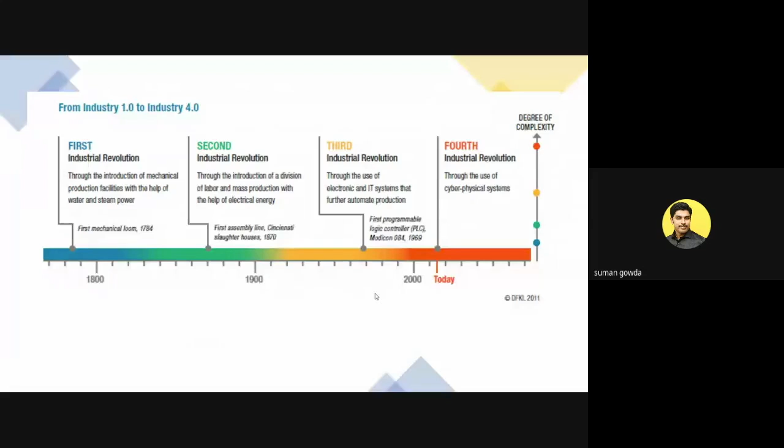To give you an overview, Industry 4.0 has somewhere around more than 10 different aspects which combine together to form a very good process. For example, 3D printing is one of the agendas in this complete portfolio, alongside IoT platforms, smart sensors, and authentication. So 3D printing is also playing a very important and major role in this Industry 4.0.

So when we talk about what kind of major role it's going to play, there was a study done where almost more than 10,000 different industries were considered for the study purpose.

When they were asked what is the first thing they would like to implement in their organization, smart sensors or connected sensors was the first option. Connected sensors are essential for every organization, whether for authentication, entry, or attendance registers where a thumbprint gets scanned. All these processes are related to connected sensors.

3D printing came in second position, where almost 37% of industries said they would like to implement 3D printing in their organization. Why is that required? By the end of the session, we will be able to figure out what might be the importance or the process in which 3D printing plays an important role.

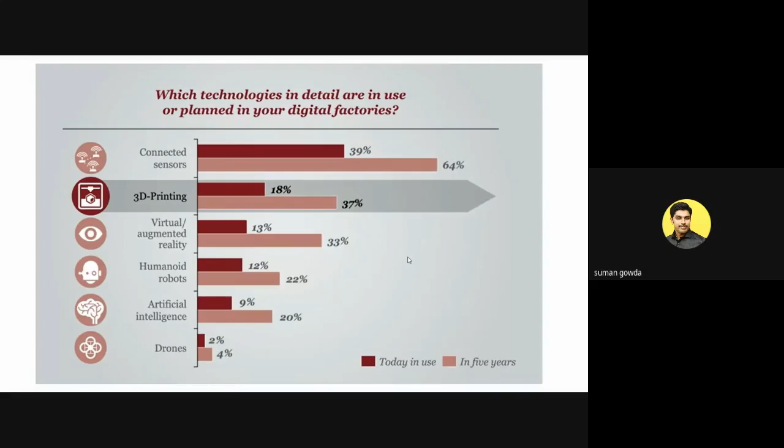When we talk about the industry sector, it can be segmented roughly into around 10 different segments, where automotive, aerospace, consumer goods, and architecture play a very major role.

In those segments, aerospace, automotive, and consumer goods each have an equal share of more than 15%. Normally with applications we don't see such scales, because usually some industries have usage more than 50%, and some less than 10%.

Here, if you closely observe, medical or dental has around 14%, aerospace has around 15% applications, automotive has around 16%, and consumer products has about 18%. So each and every industry needs 3D printing, or is adopting 3D printers.

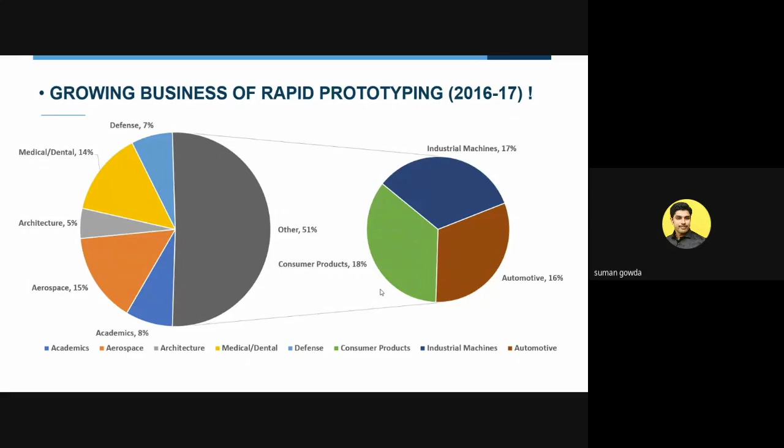3D printing is playing a major role in all segments, even including healthcare, which we'll come to later. If we talk about the targeted or expected portfolio growth, it's expected that aerospace and healthcare industries are going to have a major impact with the help of 3D printing.

Why is that? The reason is 3D printers are the first and only option these industries can use for developing their products at a much simpler, faster rate. Later on, automotive, industrial, and other segments come in.

Now, where exactly is the education industry going to play a major role? In education, it's critical for us to know how 3D printers are used in industries, so we can train ourselves and our students, making sure that once they go out from engineering colleges, they are ready for these challenges.

This is one of the hidden platforms where there is a huge opportunity for every student to get into. If a student can make use of this technology, it will be a huge benefit as soon as he goes to any industry, because every industry is looking for a person trained on 3D printers and how they can implement 3D printing related to their business plan or product line.

What exactly do we mean? For example, in the current scenario, consider manufacturing of any product, like a water bottle or a shoe, that you can go into any market or store and buy and bring back home.

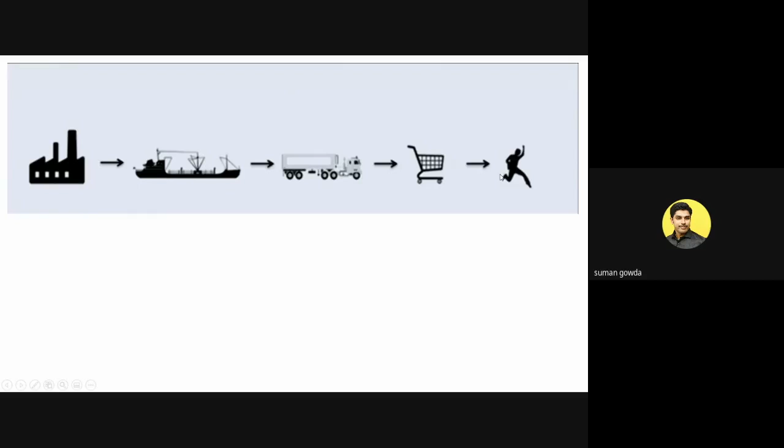But what was the original process? That product was manufactured somewhere else, then shipped from one place to another, then transported to a warehouse, and then from that warehouse transported to the local store, and then from the local store we buy it.

Now just imagine if we can eliminate all the middle processes, meaning a person who wants something can actually manufacture that same product on its own. This is where companies like aerospace and healthcare get a huge benefit out of it. The reason being, in the aerospace segment, if Airbus is manufacturing a product, the parts are manufactured throughout the world.

And parts might be coming from India, Germany, US, all the parts have to reach one location. So now the difficulty they'll be facing is transportation will be a major challenge.

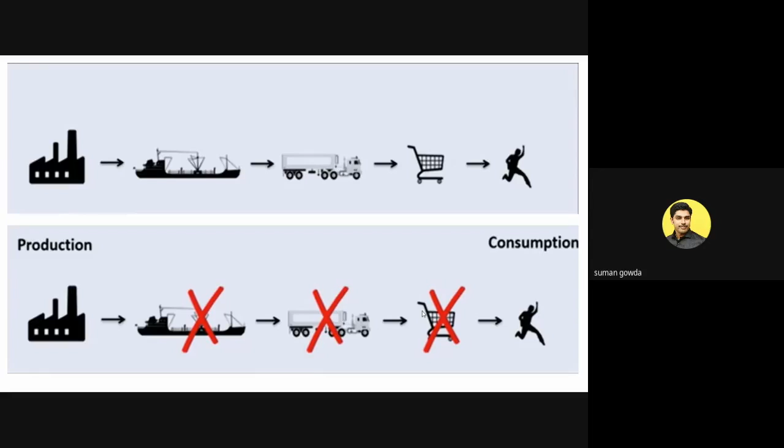If we consider this recent situation, like during the lockdown stage, face shields and face masks were very huge trending topics for 3D printing. Each and every person who has a 3D printer came up with an idea of 3D printing face shields or face masks so they could print it and give it to their neighbors or their surroundings. So this is the topic where we are discussing where a user can become even the manufacturer.

We do not have to depend upon the complete manufacturing cycle where the product has to come from the main facility to you, passing through all the different cycles. It can directly be a situation where the person who wants a product can actually manufacture it by himself.

So let's imagine we want a particular kind of shoe, a shoe brand which is exactly to the shape of our leg, exactly to our fitting. It's not possible for us to get a custom made shoe for an affordable price range. So now with the help of 3D printing, there are technologies available where we can directly 3D print the shoes as per my requirement.

Once I have done 3D printing of my shoes, I can contact my neighbors, my fellow mates, and give them too. So this will become an internal cycle where every person can afford and get the products with very close proximity, and they don't have to worry about the global manufacturing sectors. Everything they want manufactured can be available only within their surroundings.

So this is the main agenda which 3D printing is talking about in the Industry 4.0 segment. Of course, it might take a very long time, maybe 10 years or even 20 more years, but this is the kind of agenda which 3D printing is actually coming up with.

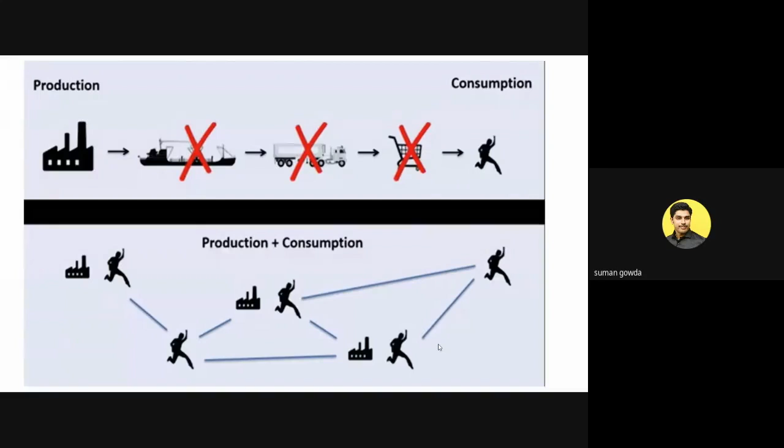Now, if we talk about what all products it can do and why it is so much required, here is one example shared by NASA, where along with their space station they had sent a few humans to space. Along with them, they had also sent a small 3D printer.

So in case when they were in space, if they wanted any kind of mechanical tools or equipment, they don't have to worry or wait too long. The time it takes for a rocket from Earth to go to space and get those materials, it's very affordable for them to carry a 3D printer with them instead, and then they can 3D print their own parts.

So this was one of the experiments done under particular conditions. But just imagine the fact that they can carry just a 3D printer with them, and maybe after 1 or 2 years, if they want any kind of equipment, they don't have to wait for the replacement to come from Earth. They can easily replace it. So this was one such example shared from NASA.

Similarly, now we have 3D printers that are placed on submarines, on naval yards, so that they don't have to wait for any replacement for a very long time, especially in the oil and gas industry where tools and gears are getting damaged at a very regular frequency.

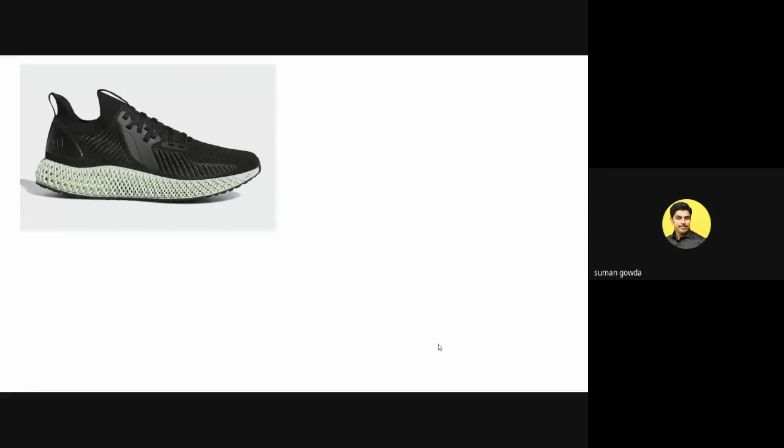So if you're talking about applications, Adidas has actually 3D printed a shoe which is completely made out of 3D printing.

Or we can actually 3D print our own specs or goggles as per the shape required, or we can even 3D print chocolates or food items. For example, Barilla 3D printed pasta. All of these follow the extrusion process.

But the process is completely different from what's used for plastic 3D printing. This kind of equipment requires a customized extrusion printer for printing chocolate mugs or pasta. So it's not a direct solution, but the industry has already been implementing all these things, and they're already possible.

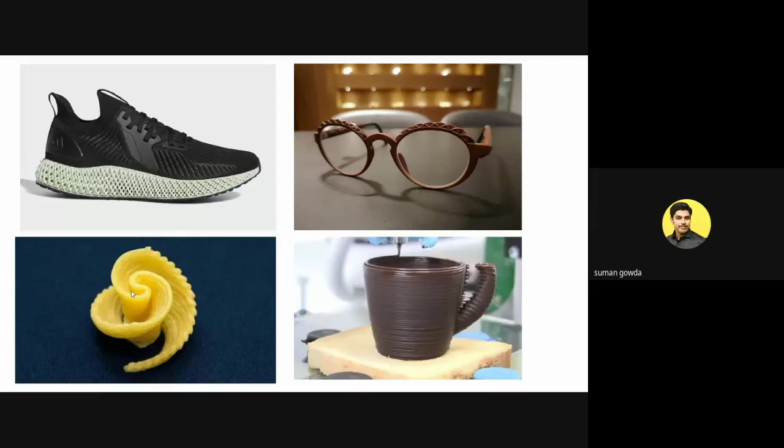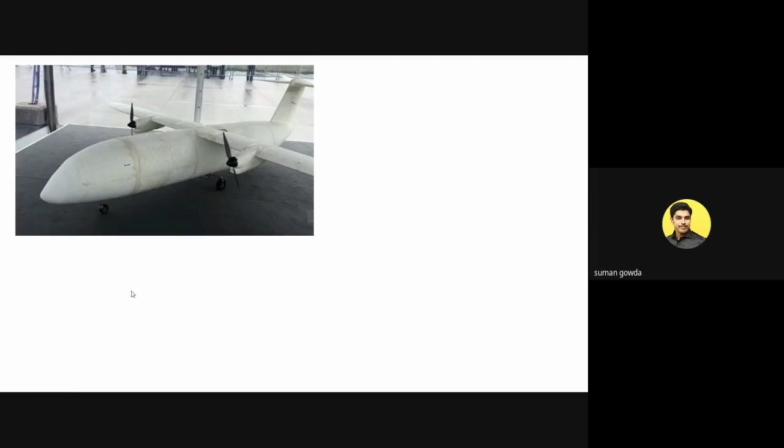If we give an industry-based example, in aerospace we have applications where an almost 10-foot Airbus flight is completely scaled down and 3D printed, and they've done testing on top of it. Based on that, it can also apply to four-wheeler vehicles, where a complete car is 3D printed for wind tunnel testing and analysis, or a small drone segment, or even a 3D printed bicycle.

These 3D printed bicycles will be strong enough to be directly used for end applications. If somebody wants a customized cycle where they'd invest around 2 to 3 lakhs for a high-end cycle, for the same price they can 3D print their own bicycle, with a much better design as per their requirement. Or even a skateboard.

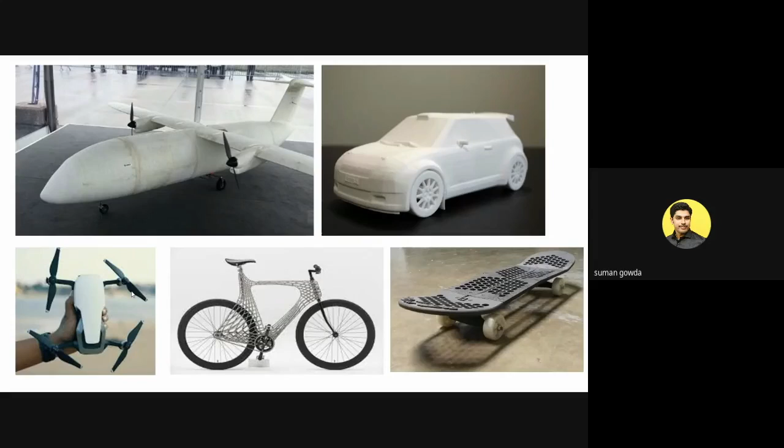These are just some basic examples I'm sharing so that once we go to the main topic, you'll be clear about what 3D printing is capable of and what extrusion-based 3D printers currently can do. All of these are related to aerospace and automotive industries.

Similarly, in the healthcare segment, there are 3D printed prosthetic legs and arms, or in case of a fracture, we don't have to wait for the traditional process of plaster of Paris being applied. Now a 3D printed sheet can directly be printed as per our customized setting, so we don't have to worry about dirt. It's also replaceable, so in case of emergency we can easily remove it and put it on whenever required.

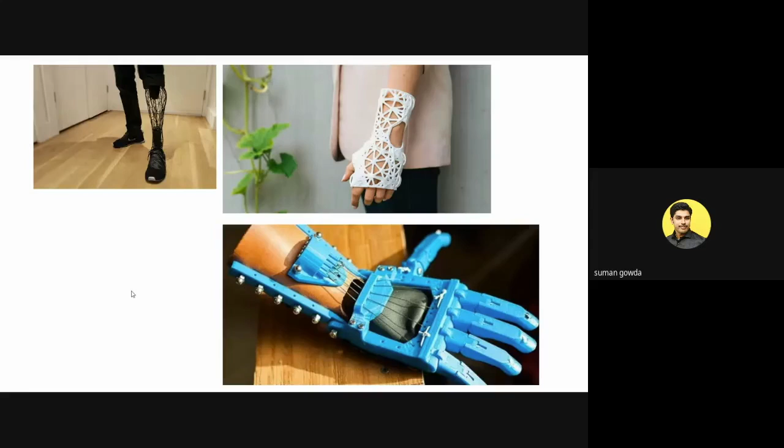Or it might be complete prosthetic arms for people with disabilities, or for robots being built, or directly for human implantation, where this extrusion uses titanium material. Titanium is one of the best materials that can be used inside a human body, so it's one such material which can directly be implanted.

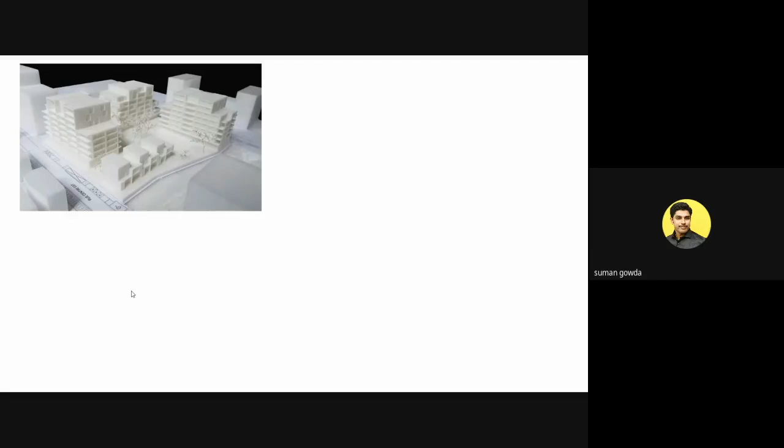Or it might be in architecture industries. I want to show two different case studies. Imagine as an architect we've done some 2D modeling, and then 3D printed that modeling. What you see on screen right now is actually a 3D printed model. But imagine what you're seeing below is a 3D printed house.

If you want a printer which can directly 3D print houses, it's not readily available in the market. But there are companies doing research, taking up projects like this, constructing houses out of 3D printers. It's an extrusion-based process — we can't call it a 3D printer, but an extrusion process in which sand, cement, and clay are mixed together and extruded through tubes.

In the second image shown at the bottom, the entire time required to build this house was around 24 hours. Of course, if you have all the facilities set up and go to build a house normally, it will take longer, because curing and other factors have to be considered. But when utilizing 3D printers to develop such a house, the entire house was constructed within 24 hours.

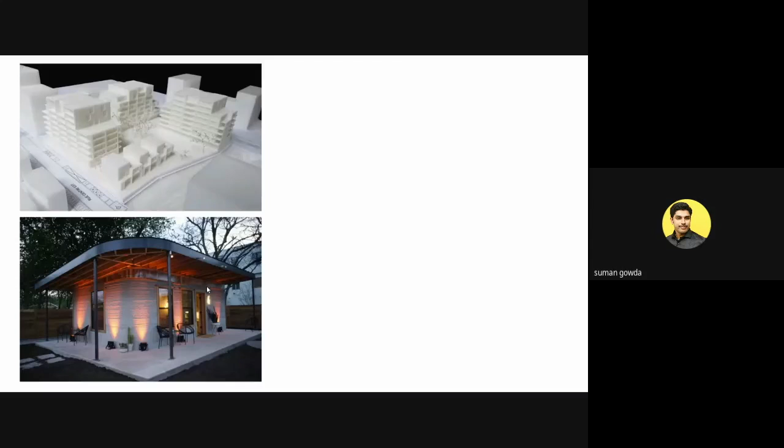So in brief, we are talking about a technology that has got no boundaries. It can be used by every industry and every individual. Either it might be consumer goods, food and chocolate, automotive, aerospace, architecture, or healthcare. So we don't have any particular segment for this technology.

So now if we are talking about how are we going to bridge the industry and academia — industry learning is something related to the business plan, related to manufacturing of the entire product, but how will it benefit from the education segment or from academia?

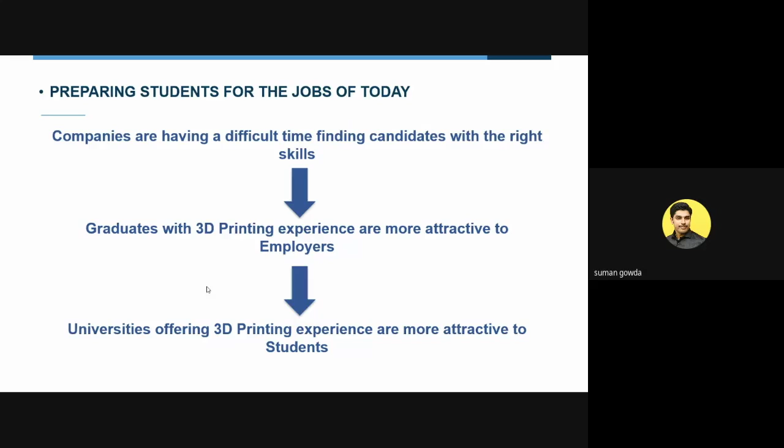In the same way, universities offering this technology would be more attractive to students, because nowadays students are very much equipped and knowledgeable about this technology. So recently, in the last 2 years, more than 20 to 30 universities have started 3D printing as their individual course in master's programs.

So this is giving us a sign that there are students very much interested in this topic, and universities willing to open up courses on particular subjects. When talking about 3D printing, they're concentrating only on one topic — it might be metal 3D printers, or sometimes only binder jets.

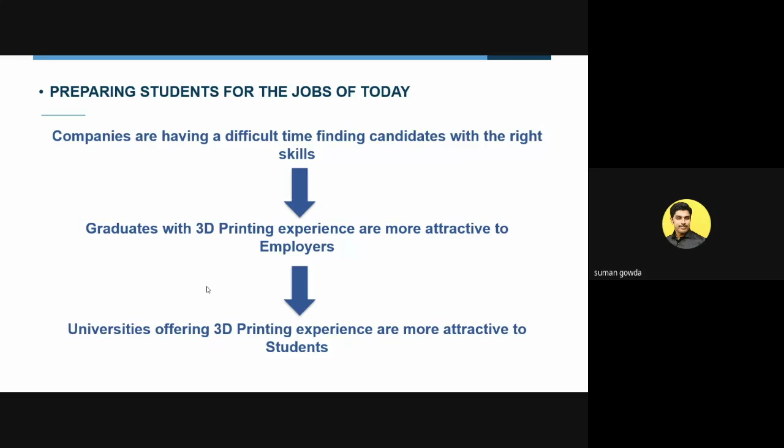So it's becoming more specific, and the main reason would be that there might be a few companies sponsoring those universities, requiring only those technologies, so that once students graduate from that particular course, it will be beneficial to hire those same students into their organization. So this is a kind of tie-up many organizations are doing with colleges.

So 3D printing is playing a very major role. Why? Because the other way of manufacturing is subtractive manufacturing, which is the conventional process — lathe, milling, grinding, drilling. These are the general processes which have been used for a very long time, maybe the last 100 years. This is the way parts are manufactured.

But in case of 3D printing, we're trying to change it a little. In subtractive manufacturing, the unwanted part is removed. In case of 3D printing, what we are trying to do is build layer upon layer.

So here, the way the part is manufactured is completely different. This example is especially for the extrusion-based process, where each line is drawn, just like a paste - as soon as you squeeze the toothpaste, a little bit of paste comes out. The harder you squeeze, the more paste comes out. It's the same process.

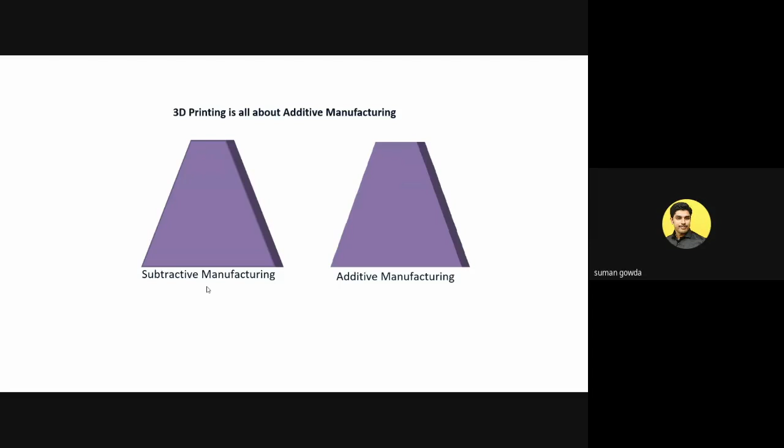Since we are adding one layer upon the other, we call it additive manufacturing. So if you're talking about the manufacturing process, the actual name for this technology is additive manufacturing. Just to simplify the name, or use it as a common term, we call it 3D printing. But the actual name for this technology is additive manufacturing.

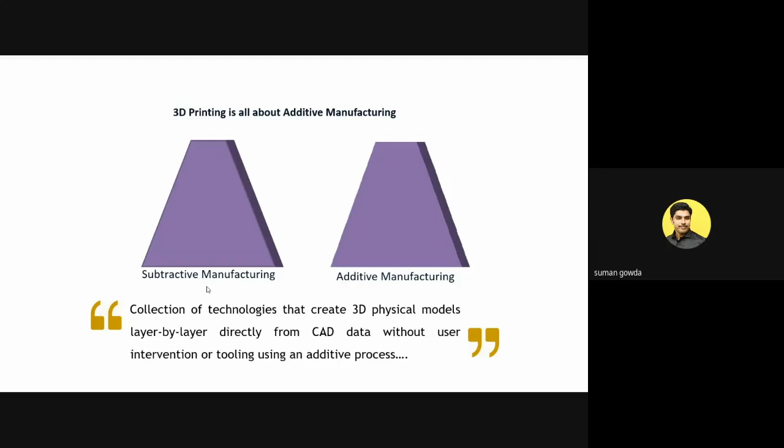If we're talking about the basic differences between these two technologies, in subtractive manufacturing we use materials like a complete bulk or block, where we do machining and remove the excess material. In general, we can say that in subtractive manufacturing, 70% of the material goes to waste. In additive manufacturing, less than 10% of the material goes to waste. So we save a lot of material, which in turn means we save on material cost as well.

When talking about time, in subtractive manufacturing the time required might be 2 to 3 weeks, or sometimes even months. In the case of 3D printing, we can develop a part in a span of about 3 to 4 hours.

We saw the example of the shoe manufactured by Adidas in collaboration with one of these technologies. In the traditional process, it would have taken almost 2 to 3 months, but with 3D printing they were able to do it within 2 days. So we're talking about a difference of 2 months versus 2 days. Of course, when developing in thousands or lakhs of quantities, the traditional process is better. But for customizable shoes, as per each customer's requirement, where quantities needed are less than 2 or even just 1, 3D printing becomes the only viable option.

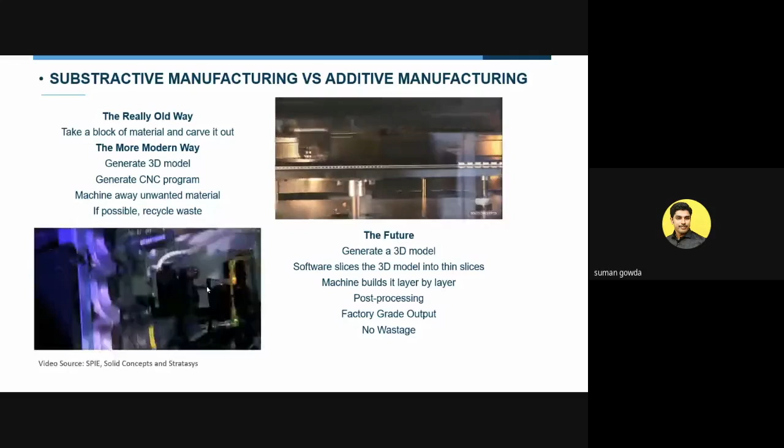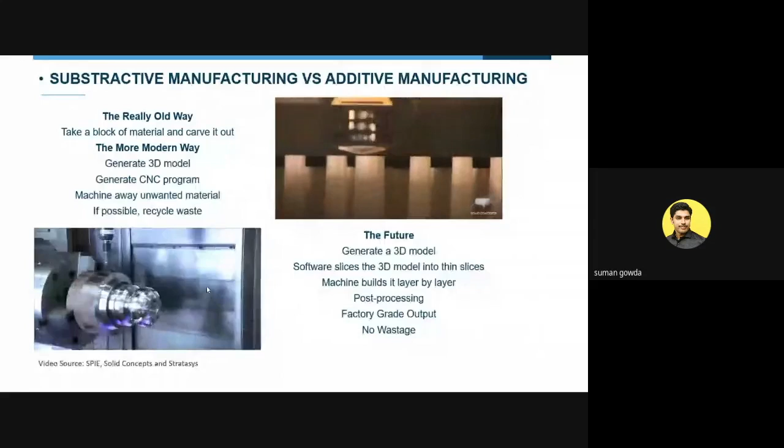Here's an example: on the left you can see how the traditional process works, removing excess material. On the right you can see 3D printing operating. There's no wastage, and no requirement for frequent tool changes. Once you start the printer, you can go home, come back after the required time, and the part will be ready.

This is the user-friendly nature that 3D printing provides, allowing us to implement 3D printers in all organizations. Because if somebody has to operate CNC machining or lathe machining, they have to be completely skilled, and we cannot leave the equipment unattended.

Somebody has to stay near the equipment for a very long time - maybe 3 hours, 6 hours, sometimes even 12 hours - requiring night shifts or a second person to take over. After a particular amount of programming is done, we have to do tool changes, and even before starting the programming, we should be well aware of G-code generation. All these things are required in the traditional process.

But in the case of 3D printing, it eliminates all these things. All it requires is less than 5 minutes of your work time after your designing is done - you just feed the program to the printer, and then you can go home.

Of course, now there are printers available which have a camera built in, and that camera can be connected with your mobile app, so that even if you are at home and the printer is operating, you can see the status of the printer. You can even monitor the print. For example, if you feel the print needs to be stopped or paused, you can do it from your home location. You don't even have to come near the printer. These kinds of user-friendly features are making this technology grow at a much faster rate.

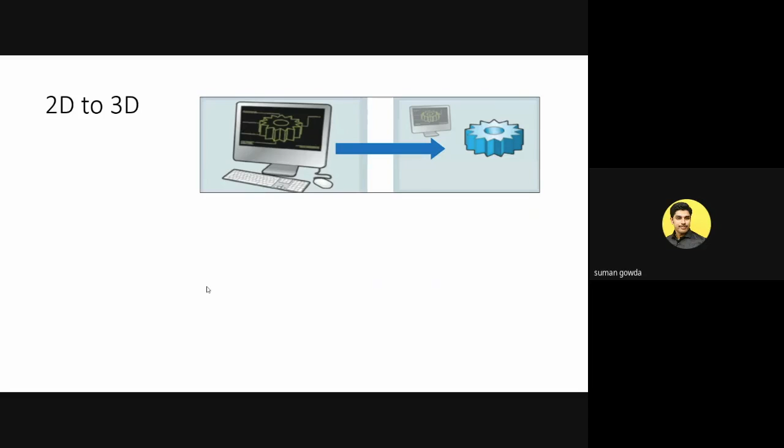So 2D to 3D, it's like a workflow. If you're talking about a 3D printing workflow, the first step would be a 3D CAD model. You, as an individual or as a group, would design a CAD model using software like Inventor, SolidWorks, or CATIA.

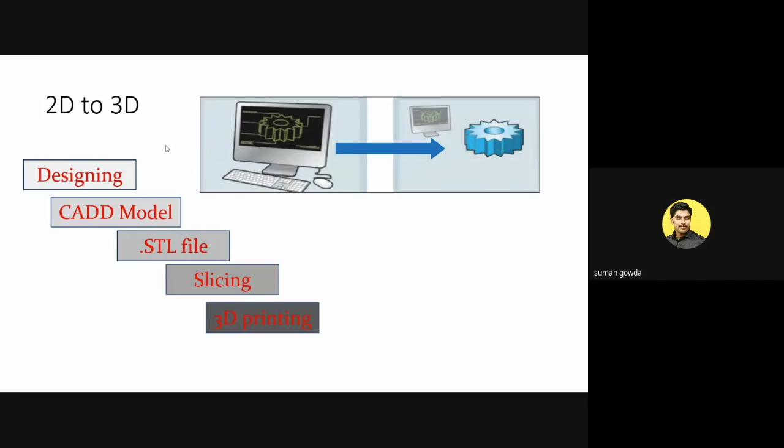Once you've designed a 3D CAD model, that model is the input for 3D printing. It's converted into a particular format and sent to the 3D printer. Once the CAD model is ready, it's fed into a slicing software. There are numerous versions of slicing software — some freeware, and some completely dedicated to particular printers. The 3D CAD model is imported into the slicing software.

In the slicing software, we do some pre-processing. For 3D printing, we need to see what orientation is required and what size is needed for printing. So we have to make a few selections.

Generally, when doing 2D printing, we just press Control+P and print a part, but sometimes we cross-check whether we need single-side or dual-side print, landscape or portrait mode — checking some 4 to 5 settings. Similarly, for 3D printing, we cross-check a few settings to make sure the CAD model comes out as per our requirement.

Once the CAD model is imported, the slicing software slices it into different layers — it's a process of additive manufacturing. Let's imagine a simple half-liter water bottle: it would be sliced into around 200 different slices, with each slice as thin as 0.2mm or even 0.1mm. That sliced model is printed one layer upon another. After watching a few videos, you'll get a clearer idea of this.

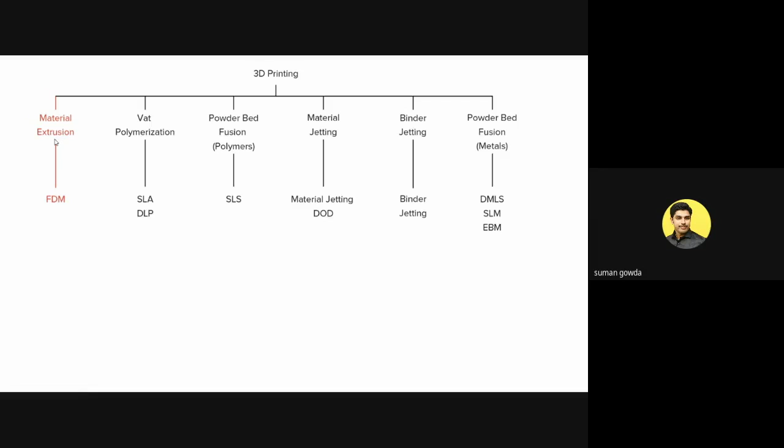In extrusion process, the main materials we use are plastic related materials. The plastics might be standard basic plastics, engineering grade plastics, or completely high performance plastics. As I showed a few slides before, you can also 3D print chocolates, 3D print houses, 3D print medical parts. But even though they follow extrusion process, we do not have particular equipment or printers readily available for them. Those are all still in experimental stages, where few companies have customized the same FDM printers as per their requirement.

In case of medical, we are talking about injection - the process is similar to that of an injection. Just like how the injection is pressed and material comes out from the needle, it's the same process. But instead of using a liquid, in bioprinting process, we actually use human cells. The human cells are cultivated, then printed in the required area, and then processed further.

In case of 3D printing of houses, all the mixtures required for building a house are mixed together, and then it is extruded as a paste coming out from a toothpaste tube.

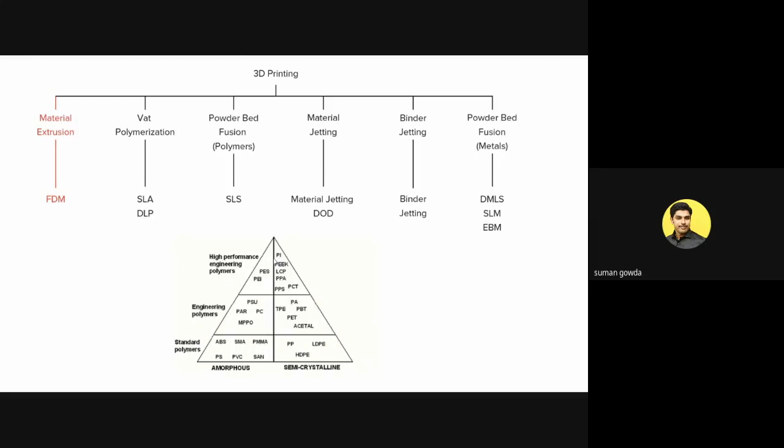Coming to the main topic of the day, the extrusion process. Since extrusion process is just a general name, FDM is the main name we consider for this technology - fused deposition modeling, where the material is fused and then deposited. I'll discuss the working principle later, but if we look at the common agenda, we can consider an example of a candle. Once we light up the candle, the wax melts, and the melted wax will be in the form of a molten liquid, and then it actually drops.

It actually drops sometimes on the floor, or sometimes it hangs on the sides of the candle. But as soon as it drops, let's imagine the candle is being melted and it drops from the candle to the floor. As soon as it drops on the floor, it comes back to its normal wax condition, meaning it comes back to a very hard wax.

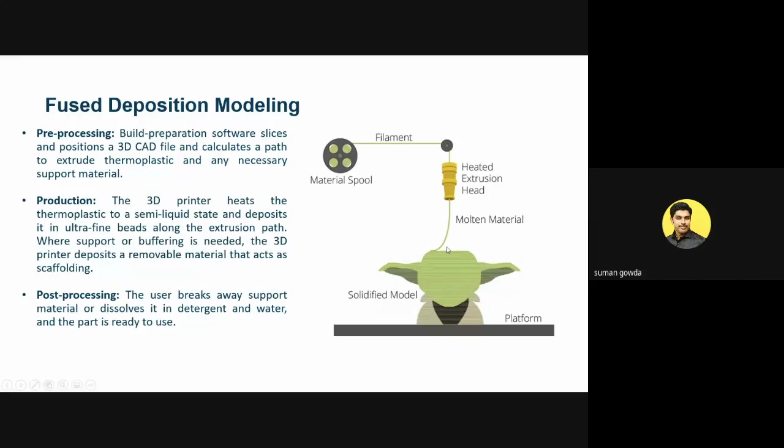So just to get more overview regarding this process, let's consider an example where a plastic wire is being inserted into a nozzle tube. Inside this nozzle tube, we have a very hot temperature, somewhere around 250 degrees. As soon as the material comes to this position, it gets heated, and the material becomes a molten liquid, like a molten paste. So the hard plastic which comes from the top, by the moment it comes to the bottom, it will be like very soft plastic, and then that plastic is deposited in the required direction.

As soon as it is deposited, within a few fractions of a second, it once again gets dry, coming back to its original plastic condition. The time when it got deposited will make sure there is a very strong bonding between the top layer and the bottom layer. The process would be something like this.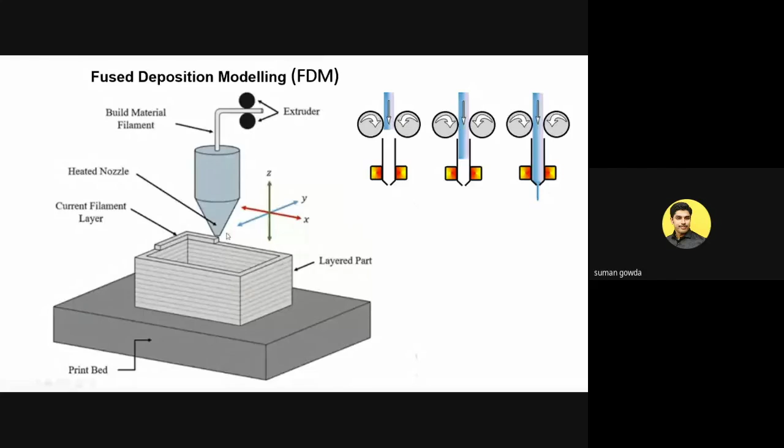Now, the material at the top comes to the tip, and there will be two rollers which guide the material inside. You can see this red and yellow color - this is actually the heater. This heater makes sure the temperature is maintained at about 200 degrees based on the material we are using. As soon as the plastic material comes to this position, it becomes liquid plastic, like a molten plastic. Then that molten plastic comes out from this tip as a molten liquid, and it is deposited in the required direction. As it gets deposited within a few fractions of a second, it gets dry.

This will be one other example - in reality, the material comes in over here, the roller rotates and pushes the material inside, the heating takes place in this position, and the material comes out from this tip. So the complete extrusion process principle works on the same agenda, where the material is inserted from one end, gets heated, and comes out from the other end as a molten liquid. The area where the material has to be deposited is completely dependent on the way the programming is done or the way the model is constructed.

So for example, if you're talking about a CAD model and we have designed some water bottle, there will be circular shapes. And if you have designed some other equipment, the model deposition will be in that particular direction. So we have a small video related to how this entire process will work.

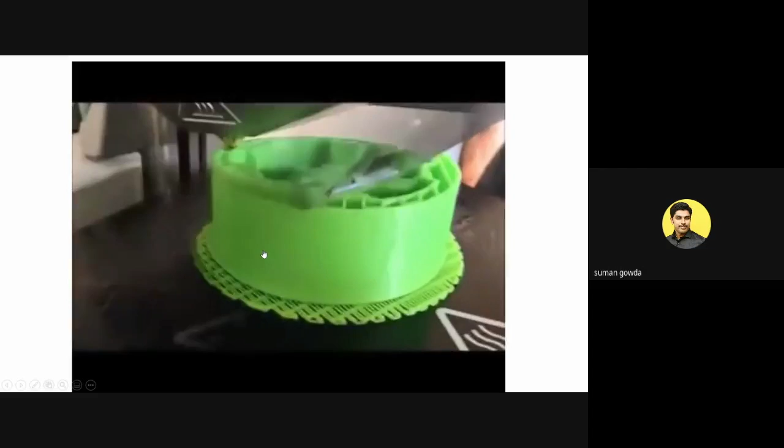So here we are actually 3D printing a small tire - let's imagine this is the tire of one of the automotive vehicles. The part which is getting printed is of a single extrusion process. We'll come to that stage later.

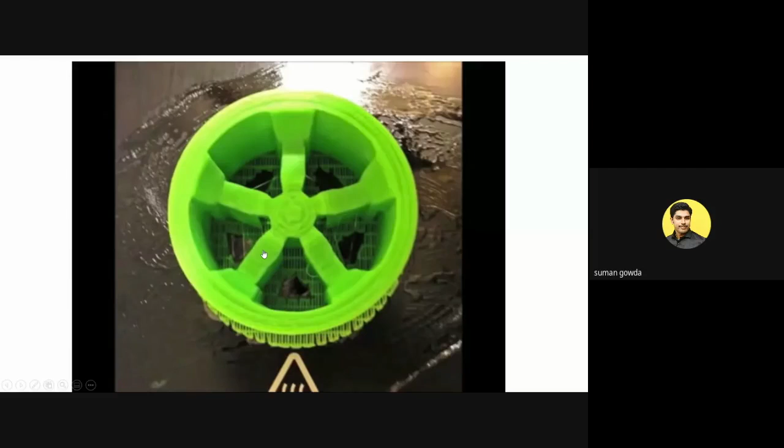So here, as we saw, the X and Y axis movement happens based on the nozzle movement. And as soon as the first layer is completed, the bed moves down a little bit, and then the second layer will be printed on top of it.

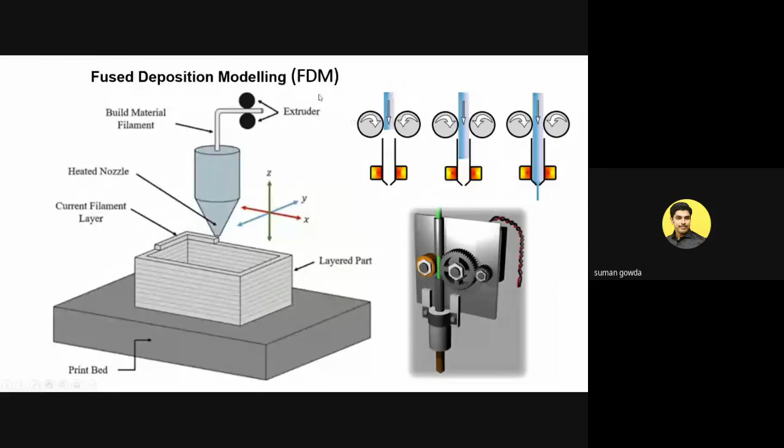Of course, there are many alterations that are being done - for example, in some cases the bed remains constant, so once the first layer is printed, the nozzle itself goes a little bit higher to print the second layer. But overall the principle follows the same idea: the material comes in from one end, it gets heated, and comes out from the bottom as a heated nozzle. So if you're going to see the timeline view, for example, how you're going to print a larger volume, how it's going to get constructed.

So now we are trying to 3D print a skyline view of New York Brooklyn city. You can also see the time frame, like how much time is required for printing such a part. We are talking about 3D printing an entire skyline within a span of less than 10 hours. It means we give the print maybe at midnight or late evening, come back tomorrow morning, and the part will be completely ready.

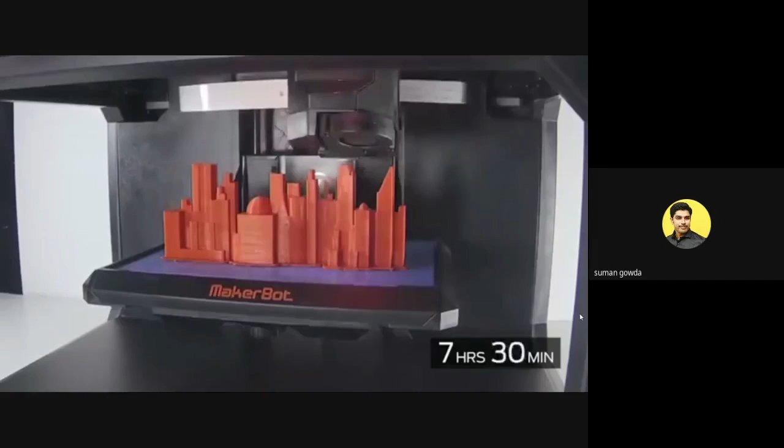Now if you're just looking at this image or this 3D CAD model, of course this is one of the models related to architectural frame. If we relate it to other industries, it might be aerospace, automotive, healthcare, or any other segment.

Now the time frame or effort required to manufacture a part like this traditionally, through the same process we've followed for the last 30-40 years, it would not have been so simple. We had to contact more than 10 to 15 guys, do a lot of paperwork, write a lot of mails, and do a lot of explanation about what has to be done.

So this is where industries are getting utilization from 3D printers. Sometimes, especially in aerospace industries, the paperwork takes almost 2 to 3 weeks just to get a small sanction or to go ahead with manufacturing any equipment. In those cases, if a designer comes up with new ideas and wants to implement them into their organization, it will not be possible to just manufacture those equipments or prototypes and bring them to the market or to the organization for the discussion stage.

All they will have to do is discuss everything on a screen. Whatever they have designed in the CAD model, they just showcase on the projector and then it gets discussed. But instead, if they have a physical model with them, the explanation becomes much easier, and they can actually use it even for end applications like fitment checking. So in today's industry cases, we will discuss mostly how these 3D printed parts are used for their end application requirements.

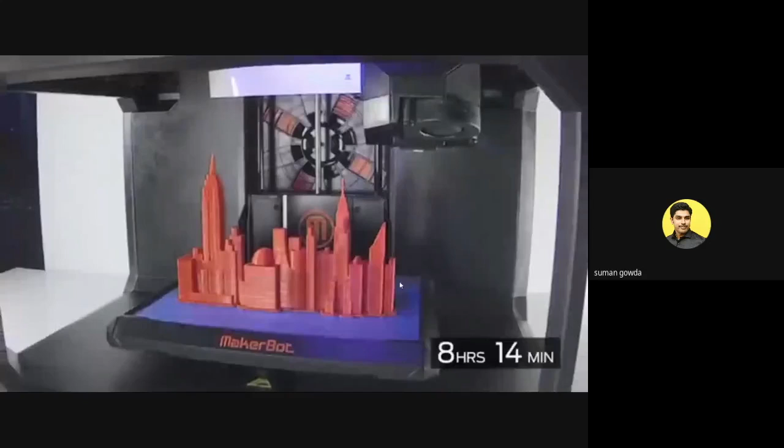So what we saw over here was a single extrusion process, but we also have something called dual extrusion. Dual extrusion is like instead of one nozzle, we have two nozzles in a printer. The process remains the same - as soon as the material comes to this position, it gets heated inside, the molten liquid comes down, and gets deposited in the required direction.

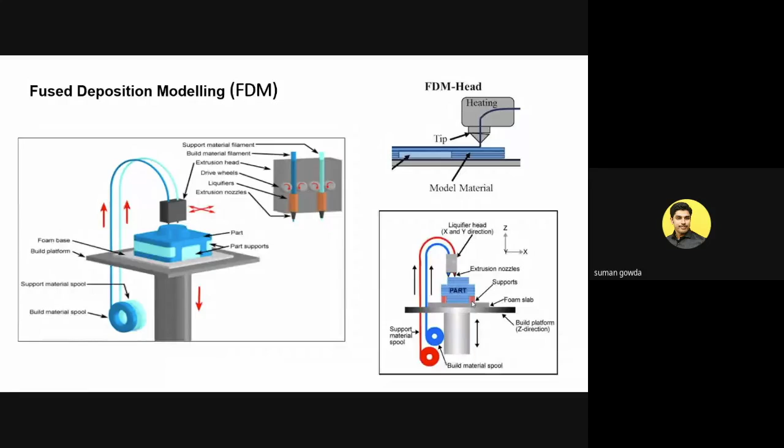So here the red material is something which is used as a support, so that once the entire printing is done, we can either remove this red material using any tools and it will easily come off. And suppose if the model is complicated and we cannot remove it through any tools, we can just dip it inside any water solution so that the material gets dissolved. So here is one example related to that.

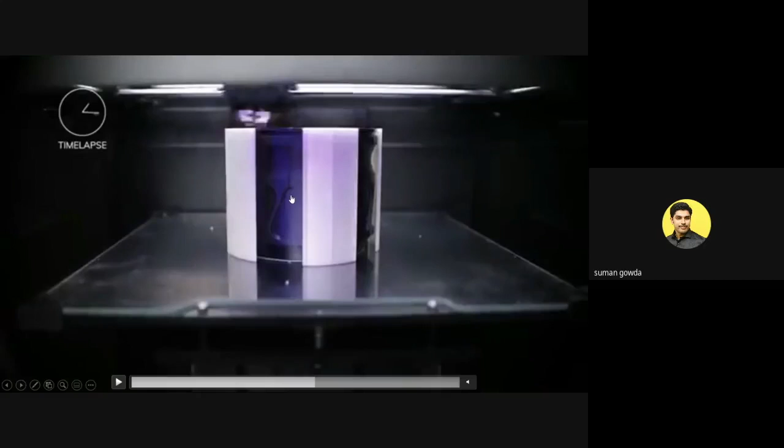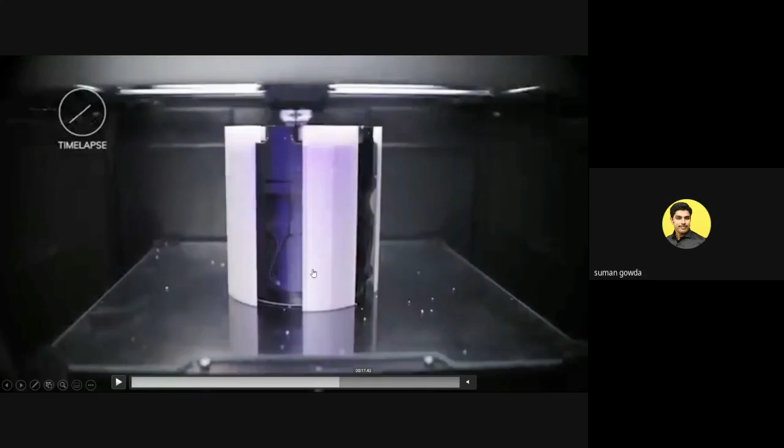So here what we saw was two materials getting printed simultaneously. The black material is actually ABS plastic, and this white material is actually water soluble material. Once the printing is happening, two nozzles operate simultaneously. It prints one layer of the model, and at the same time it also prints one layer of support. The bed moves down, it prints the second layer of model, second layer of support, bed moves down, and prints the third layer of model. In the same way, it completes the entire process.

Now this model is simple enough that I can just remove it through my hands. I can just use some force and remove this support material, or I can put it inside a water tub so that this material gets dissolved and I get the actual required part.

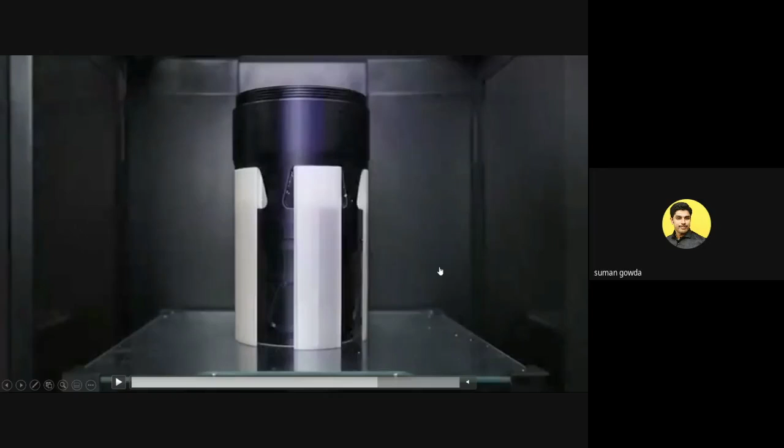So this dual extrusion process is making sure that these extruder motors are making sure that we can get any kind of complex geometries.

Okay, we have a question related to extruder motor. No, both the extruders will not be having different motors, because we cannot have one motor drive throughout. The reason would be that extrusion plays a very major role - where the first extrusion is happening, the second extrusion has to be in an idle condition.

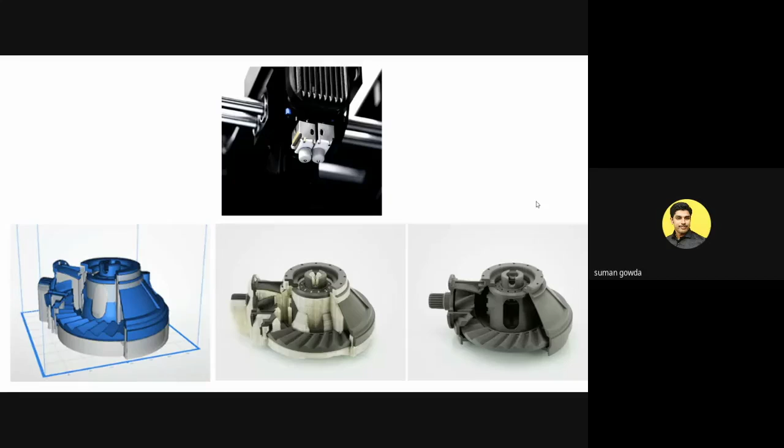So here what we are going to implement is a sliding movement. So even though it's a single motor operating, there will be a sliding movement just to make sure that when the model is extruding, the support material will not be in contact with the gears. So even though we are having only one motor, the gears will be differentiated with the sliding motion. After the model material is extruded, we have a little bit of sliding movement so that the gear gets detached from the model and gets attached to the support gear, and then the support material comes down.

So finally, when we come to the application stage - as I said even in the beginning, we do not have any particular industry or segment where this can be concentrated on. This can be effective for each and every organization. In general, this is used for concept models. Concept models are something like, even before any of the model is obtained or extracted, we just want to see how the model looks like. So we can go for that.

Or sometimes we can use it for functional prototyping. It means the product is almost ready, but we have to wait for 1 or 2 weeks to get the actual part machined or manufactured somewhere else. In that meantime, we can actually 3D print the component, fit it in the equipment, and see the functional testing of it - see how it actually performs, and once the testing is done, decide what will be the next stage. We can calculate all these things.

Or it can be even for manufacturing tools. Manufacturing tools would be something like jigs and fixtures applications, or something which can be used like a marking jig, or even like a CMM inspection jig. Or sometimes, let's say the requirement is less than 10 numbers, I can directly 3D print it and use it as my end product.

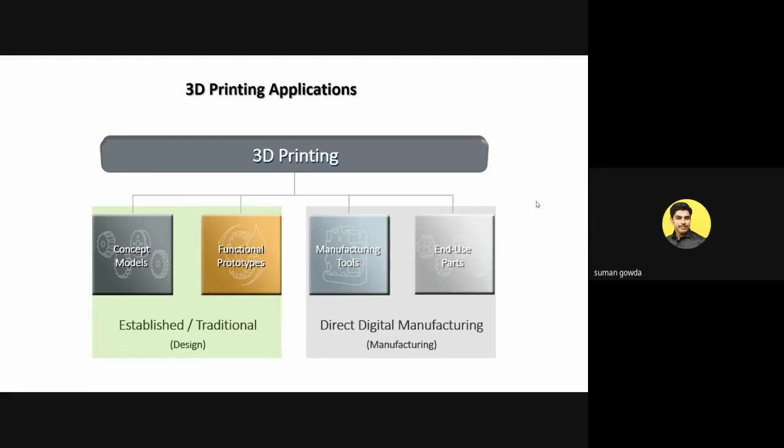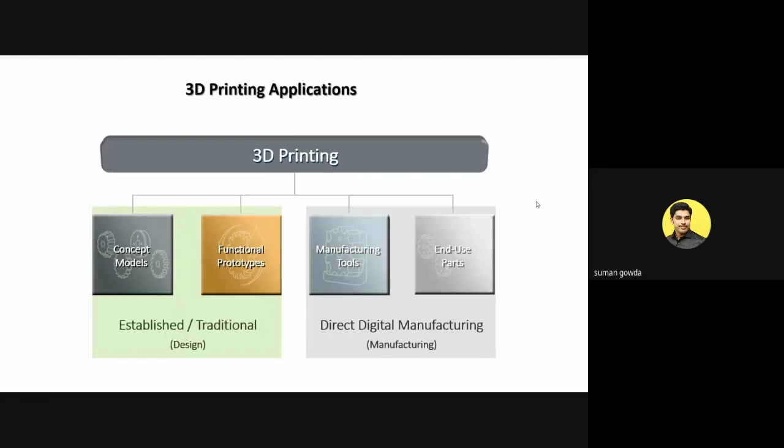In this FDM technology, we have got materials completely certified by aerospace industries, which means that as soon as the part is printed in a particular machine, in a particular material, it can directly be used inside the aeroplanes. For example, Airbus, Singapore Airlines, China Eastern Airlines have already implemented this process.

So coming to the application segment, even here, the application remains very vast. It might be for automotive and aerospace industries, or it might be even for packaging industry, or it might be for production line, which is somewhere in the assembly stage, or it can be even for bridge manufacturing.

Bridge manufacturing is something like, as we know, before manufacturing any product, what every company does is make some 500 numbers or maybe some 200 numbers of those particular products, and then they give it to the experts or to their marketing team to do the analysis, just to make sure this product will be a success in their business, or it might even be used for marketing applications. So bridge manufacturing is where before manufacturing it in lakhs, the company does manufacturing in a few hundreds.

These 3D printers can be used for doing that manufacturing in a lesser time, or it can be used for prototyping business, or we can directly print rubber-based materials. We can directly print materials which are food grade, biodegradable, or even medical safe. We can print parts for architecture or consumer electronics, or it can be implemented in a very large segment, even in the education industry.

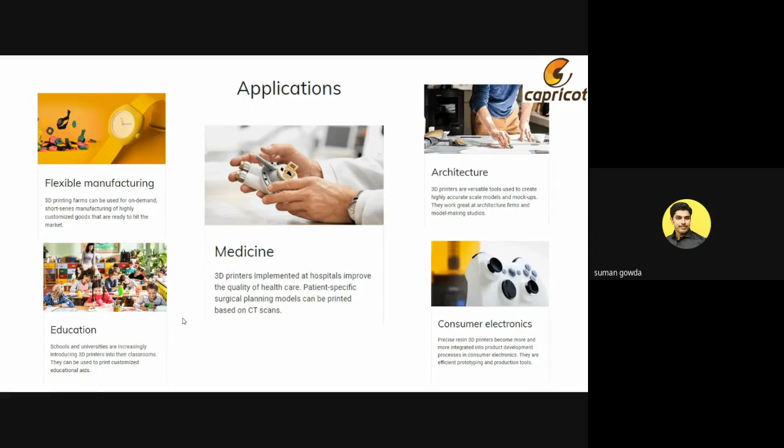So I will start with the industrial case studies. I think we are on schedule, so we should be able to finish it in the next 20-25 minutes.

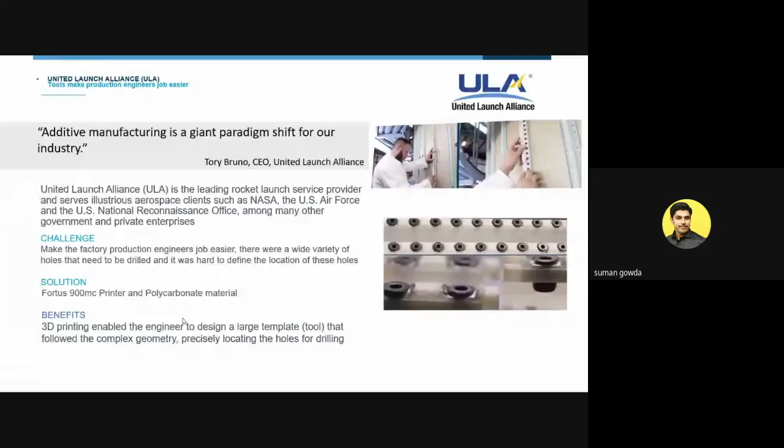The industrial cases I'll be sharing are related to the extent this 3D printed, extrusion-based printed parts can go for. And of course, we are not discussing which stage is extrusion-based printer technology better than other technological processes, because every technology has got its own pros and cons.

The applications I am showing today are such applications which are possible only with these technologies. And of course, when you are talking about metal or SLS, there are few applications which are possible only with those technologies. So technology-wise, we have got very different segments. In today's presentation, we will keep it limited to applications only for the extrusion-based process, which is FDM.

So we got one example from United Launch Alliance. United Launch Alliance are individual organizations who actually launch rockets for NASA and US Air Force. We have got two case studies from them.

The first example would be, before launching of every product, they have to do the screwing of the bolts. It's a very simple process where the nut and bolts have to be screwed in. But the problem was they will have to screw it at a particular angle, let's say around 60 degrees. And then after a particular length, they come up to 45 degrees. And then after a particular length, they'll have to come up to 73 degrees. So this is a kind of challenge when we are talking about a diameter close to 60 to 100 inches.

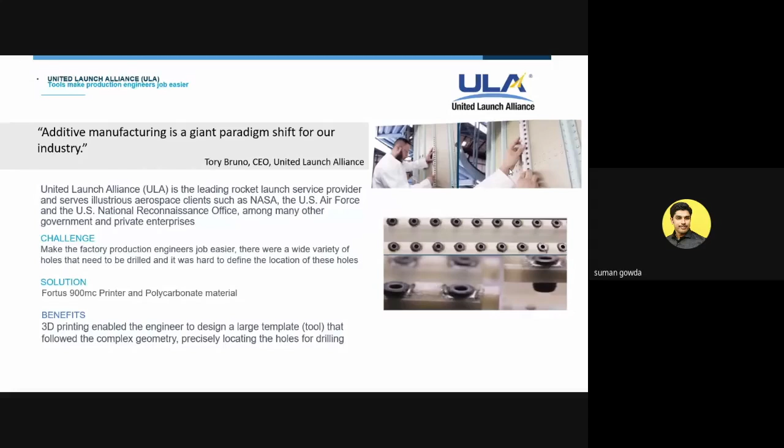So a person had to handle it in one hand and then do the marking. Since it was metal, there was a huge chance it would damage the main component. But once it was replaced with plastic, it became a huge advantage to them. The second advantage would be replacement of metallic parts with plastic. So this is one thing every industry is looking into.

Now, even if we as an individual look at our surroundings, we would realize that there are a few components around us which are made of metal. It could have been plastic instead. There's no need for it to be metal.

But what these companies are doing is, for example, there was a part actually made out of 140 different components. Each screw, each nut, each bolt acts as one component. Now let's imagine during the launching of a rocket, there are 140 parts in a small block. So the amount of vibration caused, and the amount of load or weight, is going to be very huge.

And the requirement of this product was such that it just had to pass some cold fumes. So there was no need to have a metallic part weighing somewhere close to more than 15 to 20 kgs. Instead, you can replace it with a 3D printed plastic part of less than 16 parts, and the weight is less than 1 to 2 kgs. So we are bringing down the weight by almost 90%.

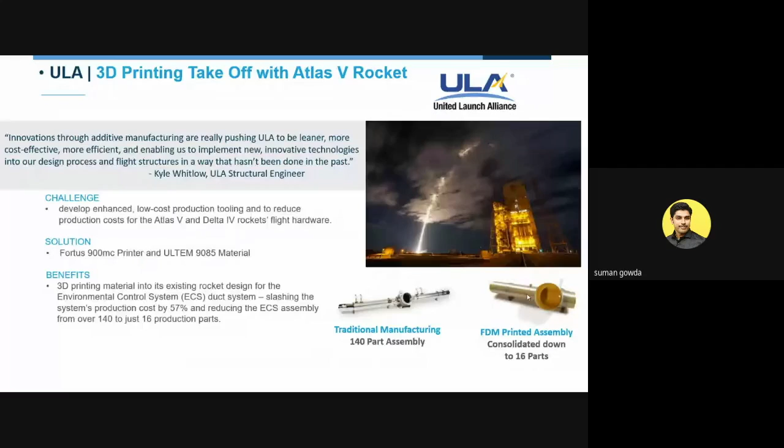And the production cost was also reduced. So when any product can save us both time and cost, we consider it a huge advantage. Now we can see an example where 3D printers are used for replacing metallic components with plastic components. And this material is such that it can withstand temperatures of around 150 degrees, which is more than sufficient for these applications.

We also have an application where an entire UAV drone was 3D printed. This UAV drone was printed with a material that can withstand about 200 degree temperature. Instead of manufacturing it using the traditional process, which should have cost too much or been too lengthy, they just 3D printed the entire model, and once printed, they fitted in the components.

Just to be clear, the engine fitted inside was also 3D printed, but that was done through metal 3D printers. If we're talking about the extrusion process though, the entire drone you see is completely 3D printed. It was printed in 3 different segments and then joined together, but the entire process was done with this particular material.

And if you go with carbon fiber or glass fiber, we'd have to implement a separate tool for that. But when your requirement is just 1 or 2 numbers, going for the same traditional process would be too much time consumption and too much cost.

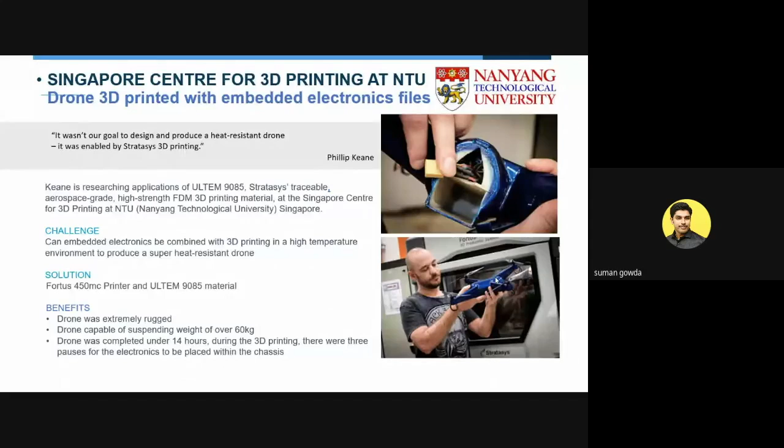Earlier, it used to be made of some other material, some other component. Now imagine they want to replace one of these components. The Airbus manufacturers cannot actually order just one number; they have to order somewhere close to 1,000 numbers. But in reality the requirement is only 2 to 3. Still, they have to order 1,000 numbers because that is the minimum requirement or minimum commitment between the tier 1 supplier and Airbus.

But now, that's not the case. If customers require only 1 or 2 numbers, they can directly 3D print those 1 or 2 components and fit them inside the airplane. There are actually 3D printers which are approved by the aerospace division, where parts 3D printed from those particular equipments can directly be used inside the space.

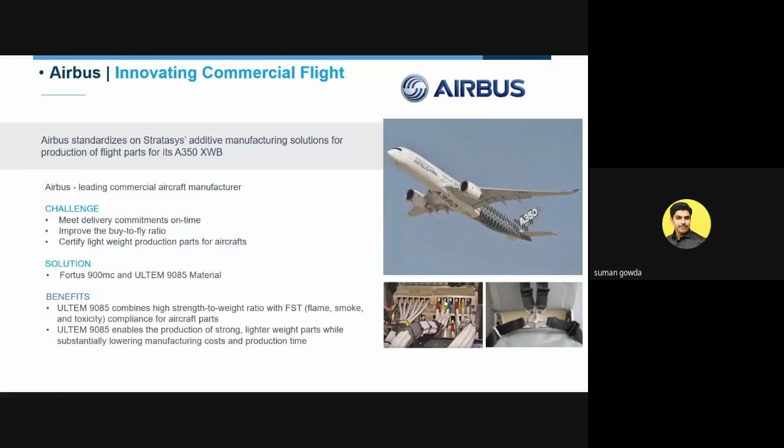Or we can see the example of NASA, where they 3D printed using a material having these ESD properties - electrostatic discharge properties. For example, if we touch a door lock, or touch wires, or touch chairs, we sometimes get a shock sensation in our fingers. That should not affect the electrical connection.

So here we're talking about applications where there are materials available which can actually replace the traditional process altogether.

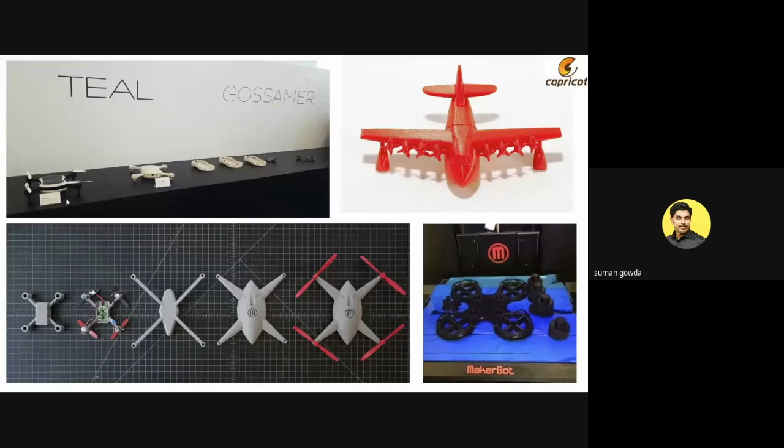We're talking about the fact that we can start from a simple concept stage and come up with the most attractive designs, or we can start with simple non-dimensional design to come up with the world's fastest drone kind of facility. So a lot of changes can be done when we talk about how 3D printing can be implemented in different industries.

So we're talking about the automotive segment. Using the process we discussed before, there will be a model material which is plastic, and a support material which is water soluble. Now let's imagine we have a requirement of making complex geometrical parts. We actually 3D print the entire part with a water soluble material, then put some wrapping on top of it, and then dissolve the entire material. So we actually get the required shape.

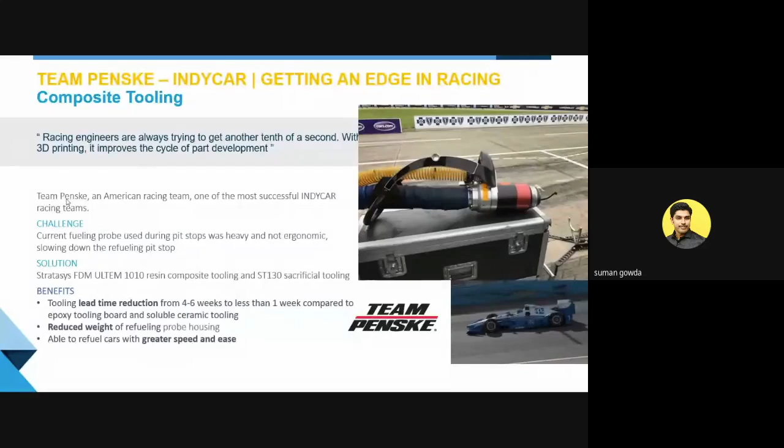One of the companies used the same concept and came up with a process where they used to get the same part manufactured in 4 to 6 weeks. With 3D printing, they got the same product in a span of less than 1 week. For a racing company where they are on a very tight time frame, reducing that by around 5 weeks of time is a very huge profit. This is one of the applications from four-wheelers.

For example, this might come into even our Indian market in the next 1 or 2 years. Whenever we buy a new car, for the front bonnet, we can actually choose the kind of design we require. Right now we get a very flat surface, but maybe after 1 or 2 years, even in India, we can tell them, okay, I need a kind of pointy surface, or maybe I need my name written on top of it. So all these versions can come up.

Recently, Daihatsu did a similar project in Korea and in Japan. So maybe down the line, even in India, we might get the same application. Of course it will not play a very major role, but imagine it will be something like customized - as soon as you book your vehicle, you can tell them that instead of the front panel being a very flat or smooth surface, I want the design to be something like this, or maybe something like this. So I can select based on my requirement. This is one application where customized products can be done through 3D printers.

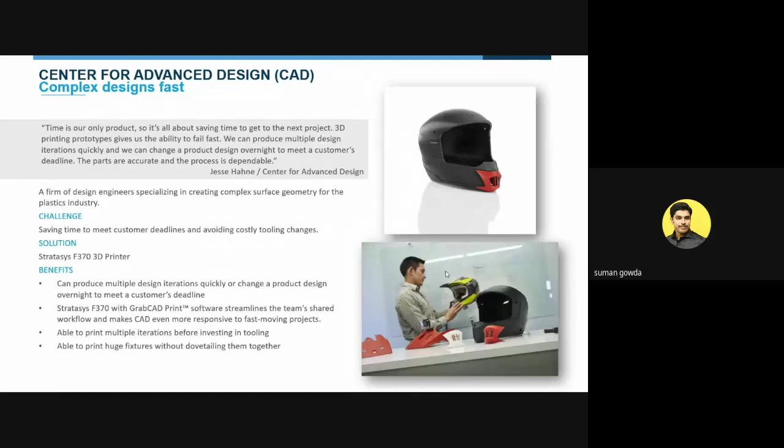Another example is actually from Germany - consider an example of a metro. Imagine on the front of the metro there was a housing cover. That housing cover had to be replaced, or they came up with a new tram where the housing cover had to be developed. But the problem was they had come up with only 8 numbers of trams. So just for 8 quantities, if they want to manufacture a tool, it's going to take a lot of cost and consume a lot of time.

But imagine a case where you can directly 3D print those 8 covers and just install them in the required places. You don't have to worry about anything because the 3D printed parts will do the same job as the traditional parts. And then you don't have to invest your cost in tool making or in other processes.

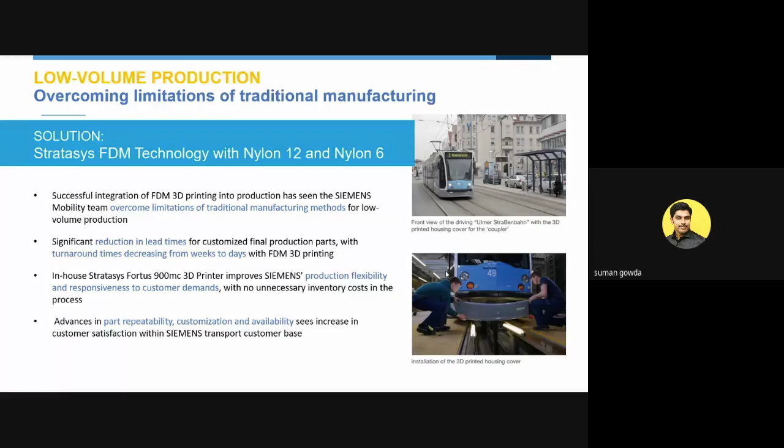So the company did this process and were very effective. They 3D printed the entire housing cover, attached it to the trams, and it ran without any issue. Similarly, if we have to replace any one component in a segment, we can directly 3D print it and replace it, because right now we have plastics which are as strong as even metals. Of course it cannot be used for a very long run, but for a short term, we can come up with alternative solutions and not keep the machine idle for that time frame.

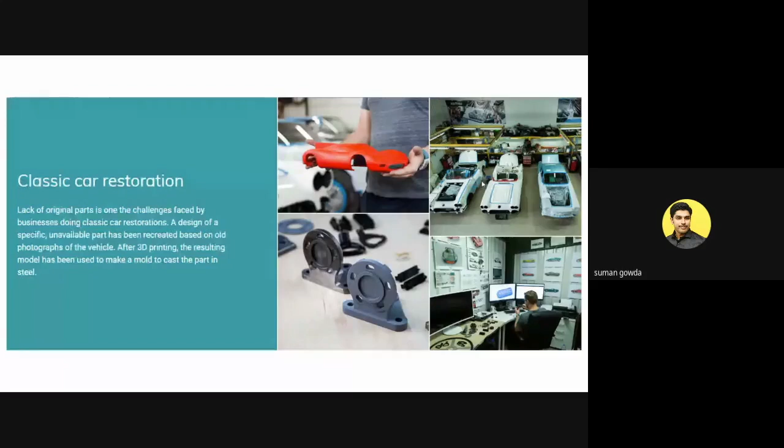Or it might be for classic car restoration, where all the old cars can be replicated, scanned, and then placed as a very small miniature model.

Or maybe during the design stage, they can plan something like this where they can see how just the internal layout looks, because the external design is done by some other team. The team actually designing the batteries and equipment can design how the placing will happen and how much space is required, so even that can be planned.

Or it can even be for the production stage. For example, here it's used as an inspection jig, where this is actually the end product being placed at a particular location just to make sure it fits exactly. If the fitment isn't happening as per requirement, they can say this model will not fit even in the final part -- so it's a rejected model.

In the industry, we cannot take all 100 models and do the scanning -- it's highly impossible. What they usually do is pick any five and do the scanning of that. It always works because it's been done that way for a long time. But imagine a case where you do the scanning of 5 parts, but for the remaining 95 parts, you can at least place them in such a component and see whether they fit in all directions. If it fits in all directions, it means it will also fit in our end part.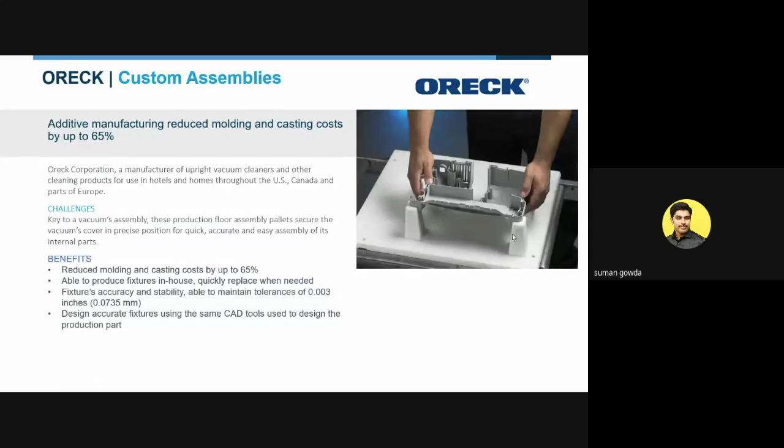Here's another example of a complete assembly line. During manufacturing of any product, we require a complete base, and if that base is made out of wood or metal, it will be too heavy -- let's say around 30 to 40 kg. So we'd require 2 to 3 people to handle it, or robots, or crane support to move it from one location to another. But imagine if we completely transform those metallic parts into plastic -- we can easily move those plastic fixtures from one place to another.

Solaxis has done exactly this, where the entire part you see here used to weigh around 150 pounds. Now they've brought down the scale to less than 20-30 pounds, so that one person can easily carry it around.

So here we have an example of attaching logos. Usually when we say attaching of logos, the majority of companies will do it just by visualization. Some companies will do it by making use of some paper clip.

But imagine if we have a dedicated tool, just to make sure that the distance between the logo from one corner to the other corner should be around 2 mm, and the distance from the bottom to the logo should be around 10 mm. So if they can make a small fixture, something like this, they can just place it in the right hand and then in the left hand they can attach the logo.

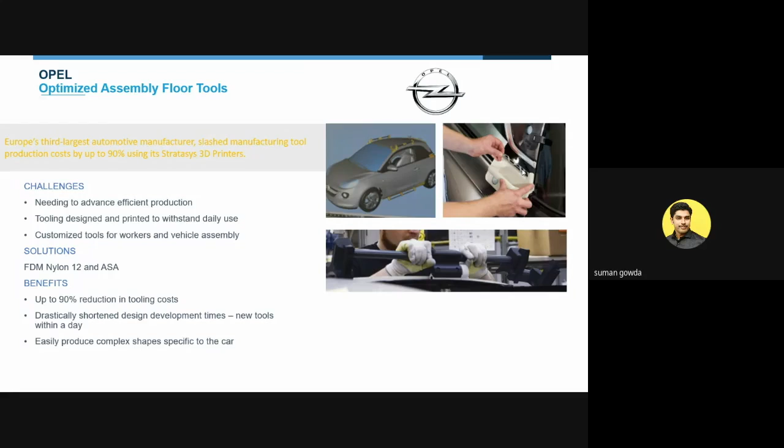It will not be such a huge thing, but once the entire model is done, once we see there are like 1,000 vehicles parked, all the logos will look exactly at the same place. So that will play a very major role for many organizations. These 3D printed tools can be used for those applications, or directly for the attachment of the logo.

So BMW has used a similar process for attaching their logos. Earlier it used to be of metal. As we know, metals cause huge problems when attaching, because as soon as the metal touches the car surface, there are chances it will make scratches or a dent in the surface.

So if we are using a plastic part with some rubber gloves on it, it will make sure there is no scratch on the surface and it will be a completely smooth workflow. Here BMW was able to cut the weight by around 72%, which means that if earlier the weight was around 10 kg, it was replaced with a part of less than 3 kg.

And given the cost, the cost directly implies the lead time, which means that when they were using the metallic one, an employee used to take somewhere close to around 10 minutes just to attach one logo, because he had to take care of too many things like scratches, dents, bumpers. He had to consider many factors and make sure the logo is attached in a perfect manner. So imagine he used to take somewhere close to 5 to 10 minutes for attaching one logo.

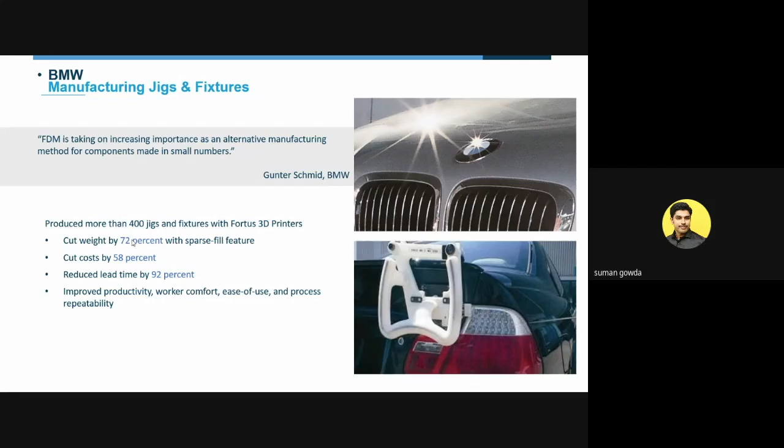But with the help of this plastic one, the time which was taking around 10 minutes, he was able to do within a span of about 1 minute, which means they reduced the lead time by around 92%. So it might be a very simple topic, but these applications play a very major role in different industries.

These are a few other applications related to the industrial base, where fixtures can be used directly for drilling applications, or fixtures for handling components, fixtures used during CMM inspections, fixtures used for electronic applications, or this is one of the similar applications we discussed earlier, where they use it for marking on a curvy surface.

So here this is a 3D printed part which has the same curvy surface, so they place it in a particular location, and then the drilling is done inside these holes, so they can be 100% sure the hole direction is as per requirement. They don't have to worry, because sometimes the drilling has to be done at an angle, let's say around 20 degrees.

A person drilling it manually will never be able to achieve exactly a 20 degree angle by hand. So with the help of this, you can be 100% sure the angles will be exactly as per requirement, because the drill bit, almost 10-20 mm in length, makes sure it gets inserted in the particular direction.

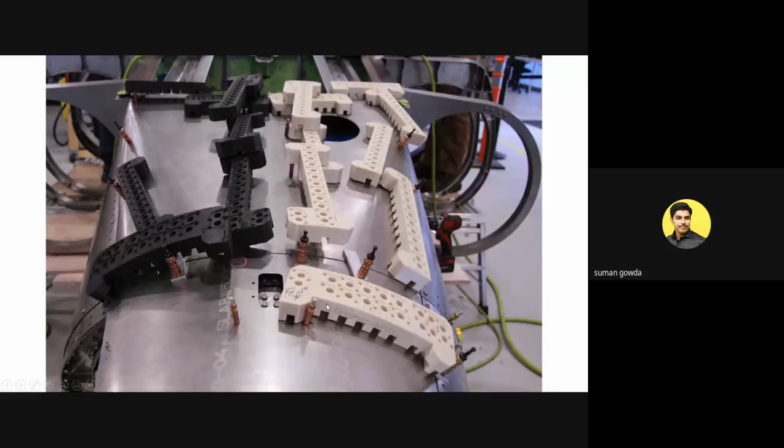Or it can be used for enclosure applications, where the part is used so that electronic gadgets can be completely enclosed within their product.

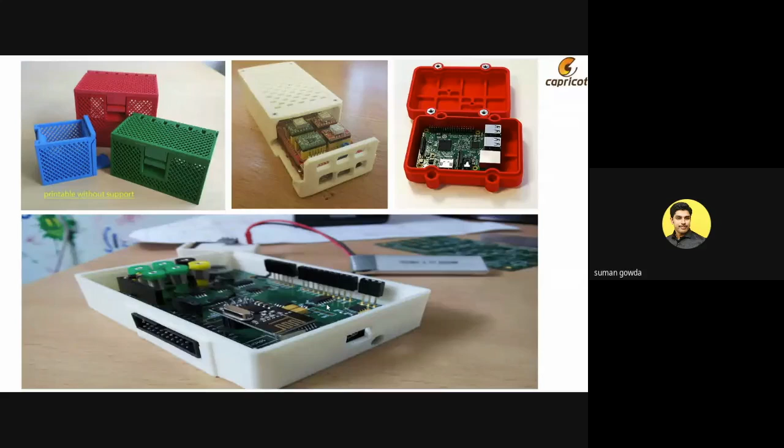It can be used for a huge cost reduction. The metallic parts which used to take somewhere around $60,000 can be made within $2,500. And if you look at the time frame, which is 10 to 14 weeks, it comes down to, let's say, even 48 hours, less than 2 days.

So we can see the kind of difference we are talking about: a difference of 3 to 4 months to 2 days, and a difference from $60,000 to $2,500. Also in terms of weight, which was around 150 pounds, it came down to around 15 pounds. So there's a huge difference between 3D printers and the traditional way of manufacturing.

And of course, with the extrusion process, because of the materials used in this technology and the ease of implementation, we do not require any sophisticated working environment. It can directly be placed next to us in our working station, or even in our classrooms or departments, and we can easily operate it.

This is of the same example, or we can use it even for applications related to bending of metallic parts, or bending of plastic components, vacuum forming, hydroforming, thermoforming. So there are numerous applications related to 3D printers.

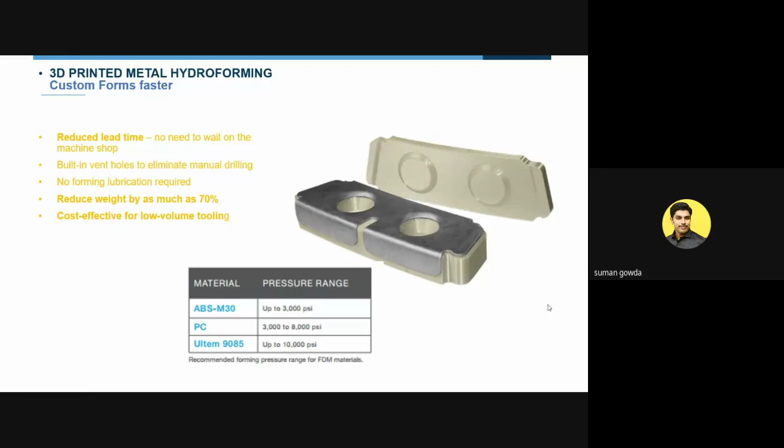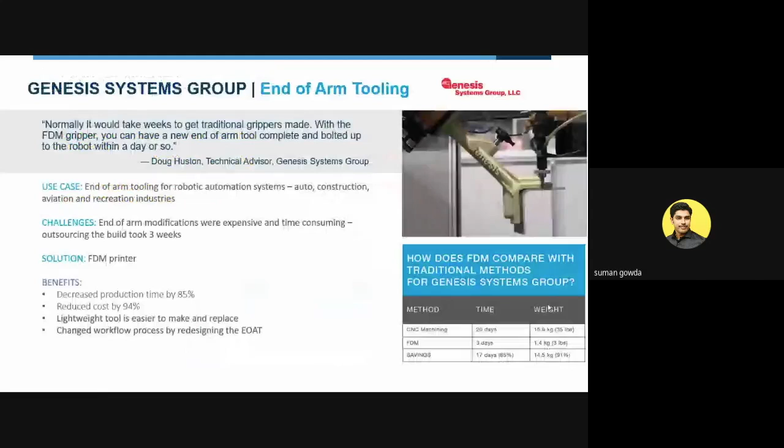So every industry, it may not directly lead to their manufacturing, because some industries will use it for design verification, and some for other applications. It may not be a direct part of their manufacturing process, but as a helping hand. So here, this 3D printed part is being used as a gripper.

Imagine a small robotic arm gripper which was made of metal. So we have an example here: this part was of metal, which used to weigh around 16 kgs. Now that 16 kg, when 3D printed, came down to around 1.4 kg.

So you can just imagine the kind of difference in terms of weight, and also in terms of cost. When they had in-house CNC machining, it used to take 20 days, but here it was done within 3 days. So there is a huge difference of 17 days of time and 14.5 kgs of weight. 3D printers are playing a very major role in reduction of cost, weight, and time, which in turn directly impacts the cost factor.

For example, imagine within 3 days they're able to make one component. In the span of 20 days, where they were able to make only one, now they'll be able to make almost close to 7. It means that the efficiency of their production is going to increase a lot.

And in case of aerospace industries, they don't have to store everything, because sometimes the inventory storage is so much that we'll have some 5 to 10 warehouses completely stored with equipment we do not know when we'll require. But imagine after some 5-10 years, we come to a stage where only when the part is required, we directly print it and take it out. So this complete inventory is not at all required, and there's no need to store the parts inside our warehouse.

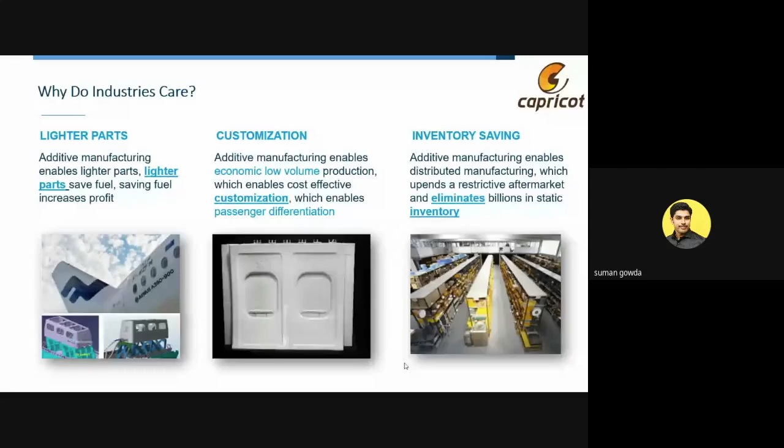With all these costs involved, the customer can easily make a component in the Indian market, 3D print it there, maybe at 10 times lesser cost. So this is how every industry is trying to adopt 3D printers.

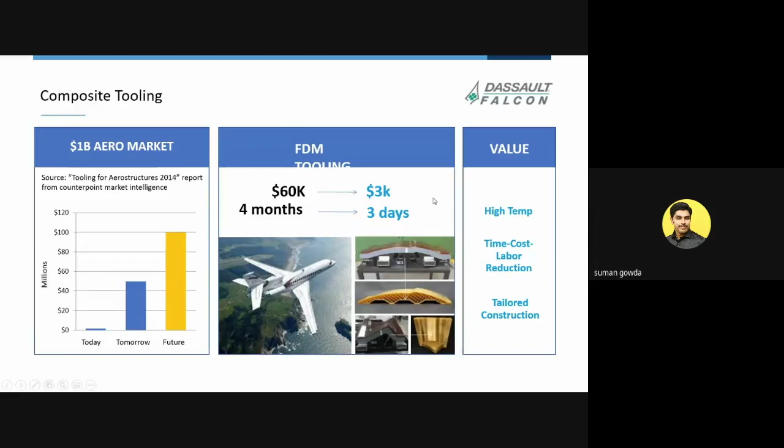So the major application would be saving both time and cost, where 4 months will be reduced to 3 days, $60,000 will be reduced to $3,000, and the number of components too. Here we are talking about a metallic component which had around 28 different components, replaced by a component which is of only 2. And of course, this is lifting a weight of around 650 kgs.

So a 3D printed part lifting 650 kgs is a very huge thing. At last, I would like to say, with the help of 3D printers, or these extrusion-based printers, what we want to prove is that 3D printers will be a better fit when we can reduce the time, reduce the cost, and reduce the number of components. It will directly affect our business plan and help us in more profit.